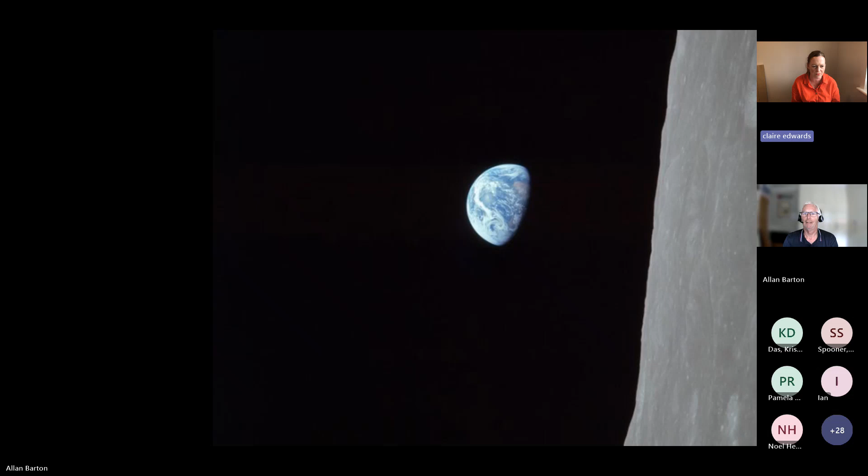So Allan, tell us a bit about the circular economy and help us understand some more. Okay, thank you for that introduction. Well, I'm going to set the scene and explain why do we need a circular economy.

I'll just look back in time. Between those two dates, three major events occurred on our planet. We discovered affordable sources of energy in coal and oil. We had an industrial revolution and our population rocketed, as did our ability to produce technologies, our GDP, the power produced, and our use of the planet's resources.

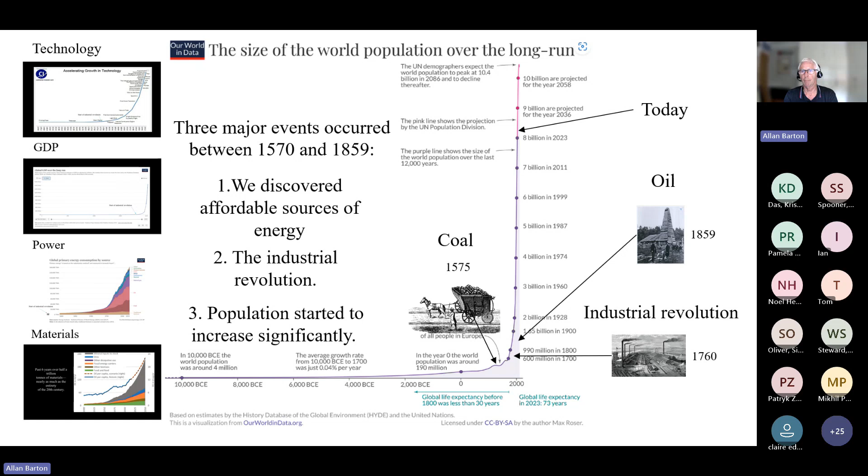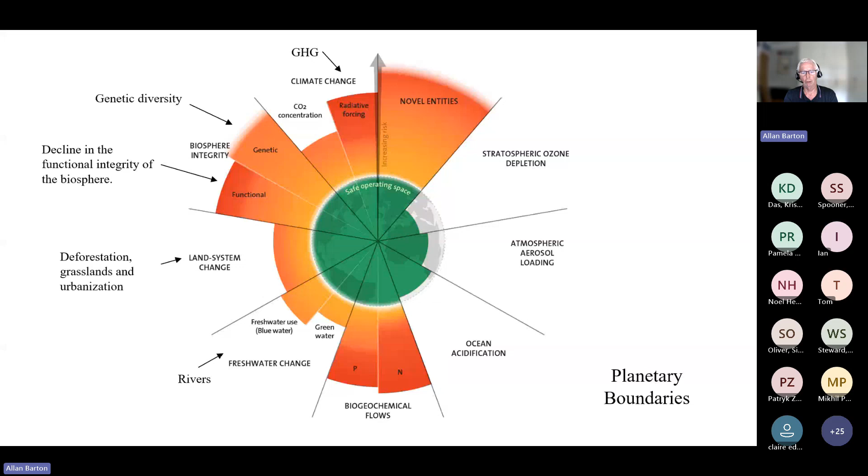And if we look into the future, we're destined to potentially have a population of 10 billion as opposed to 8. And we're already living outside what the planet can sustain, particularly with regard to greenhouse gases, the diversity of our animals, our land use, our water, our use of fertilizers, and our production of toxic materials.

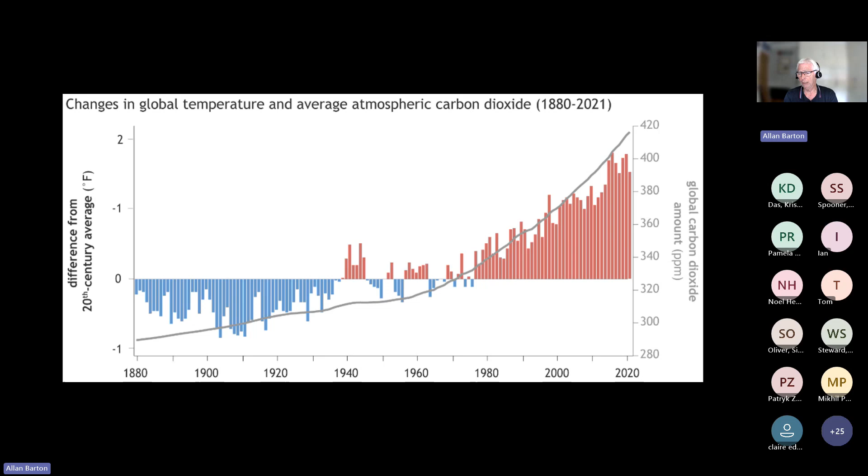And we equally have put more carbon dioxide into the atmosphere, and that's caused our temperature to rise. And now 50% of our planet is put aside for growing food to feed us. And there is a view that we are at the start of the sixth mass extinction event.

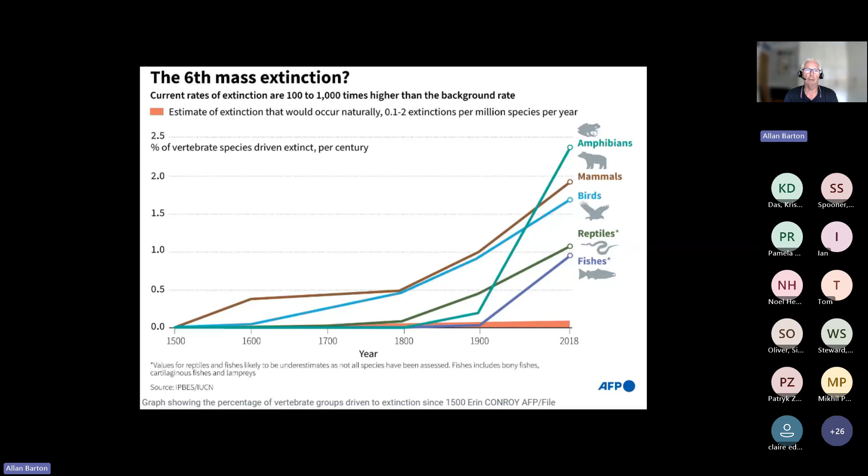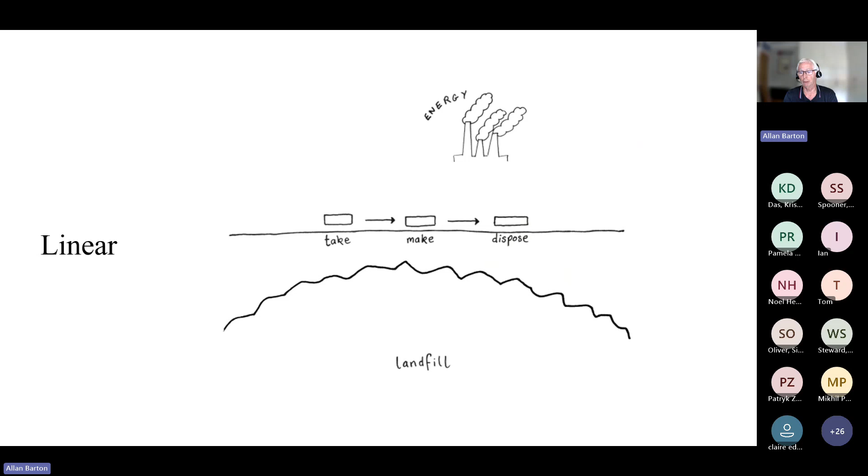And since the Industrial Revolution, we have had a linear economy where we've taken materials, we made them into something, we've used them, and then we've simply thrown them away, either into incineration or into landfill. And we still produced in 2023, 2.1 billion tonnes of municipal waste.

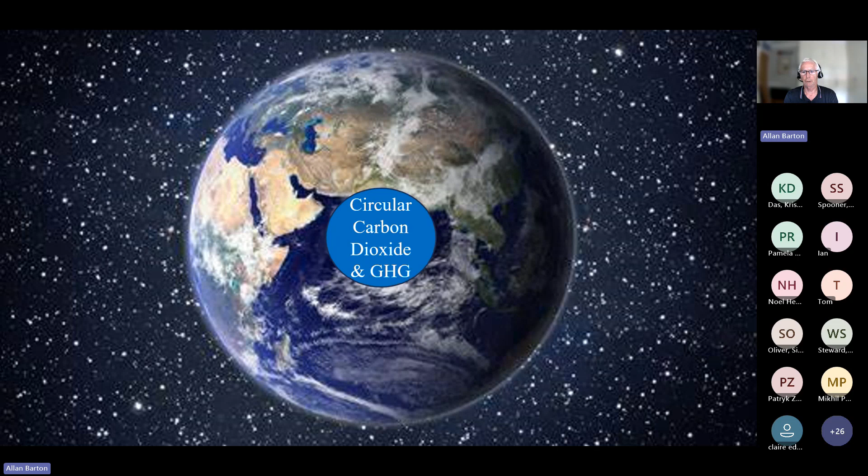So we really must start treasuring our planet. And we must start looking after all of the ecologies that we have. And we need a way of managing our home in a circular way, a circular economy. This is particularly true with regard to carbon dioxide and greenhouse gases, the natural world, material resources, water, atmosphere, and population.

Well, with regard to carbon dioxide and greenhouse gases, we must get our carbon dioxide back in balance again. It was in balance for millions of years, and we've just destroyed that. So we need to deliver on our COP promises. We need to focus on all greenhouse gases and all sectors that make greenhouse gases. We need to develop a joined up plan to achieve it, and we really should try and get back to pre-industrial levels.

As far as the natural world goes, well, we've got to stop its reduction and re-establish it if we can. And we've got to deliver on our COP promises.

As far as the material resources are concerned, we've got to start treasuring our material resources. And we've got to realise the planet's inorganic resources are finite, and they must certainly never be dispersed beyond the reach of future generations. And we should try and reduce consumption and think about the whole system when we design things. And we must try to produce no waste.

Water, well, we've got to start treasuring and managing our water. We need nature-based solutions to help us solve the problems, but we must really stop trying to pollute our water. And globally, we must try and get the global ocean temperature to decrease.

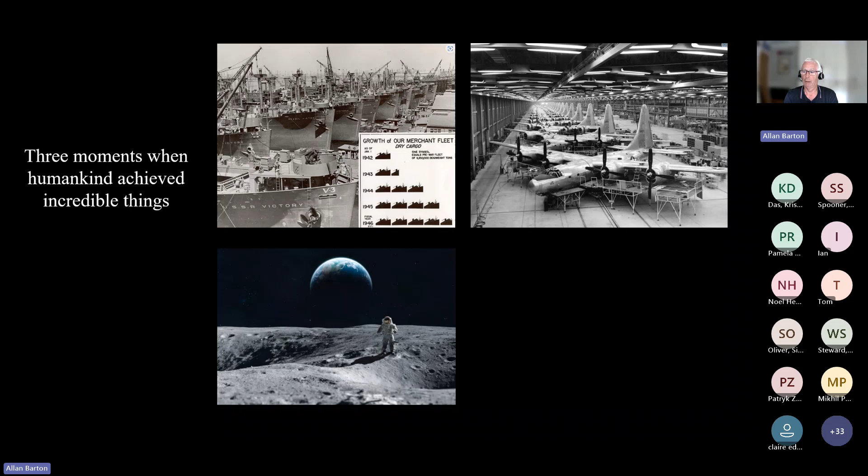Is it inevitable? Is there hope? Well, there were three moments when humankind achieved incredible things. In the Second World War, the United States increased its production of ships and planes fantastically, and we won a war. We did put a man on the moon, and we did generate a vaccine very quickly for a particularly nasty virus. We need the same mindset applied to living in harmony with our planet.

Provided we get on with it, now I believe there is hope. Thank you.

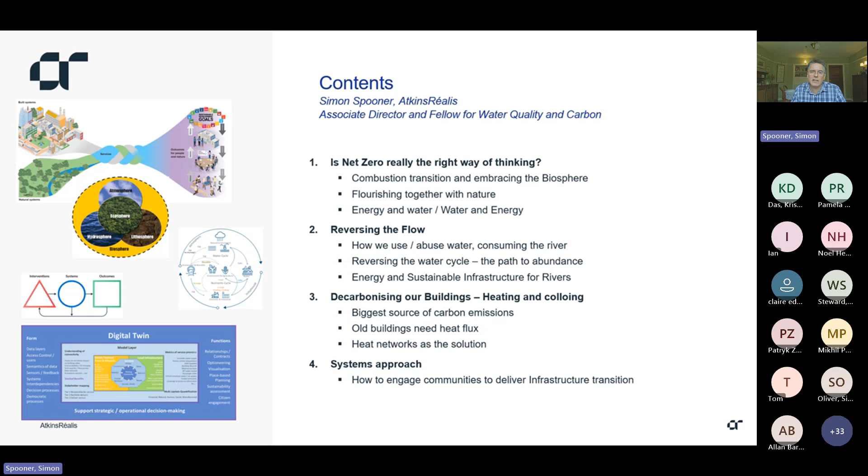But all these different approaches also need to link together. We have to take a systems approach to how we change the different parts of us, how we make interventions and understand how they work, and particularly how we engage individuals and communities in this great process of change and transition.

So I will try and introduce this. Allan introduced it: climate, biodiversity loss, pollution. Yeah, there's a problem. We've got net zero as our goal, which is a well-established target, but it's very hard to follow, to plan for, to know where we are. It kind of starts to slip away when you try and do the carbon accounting. It just all gets away from you.

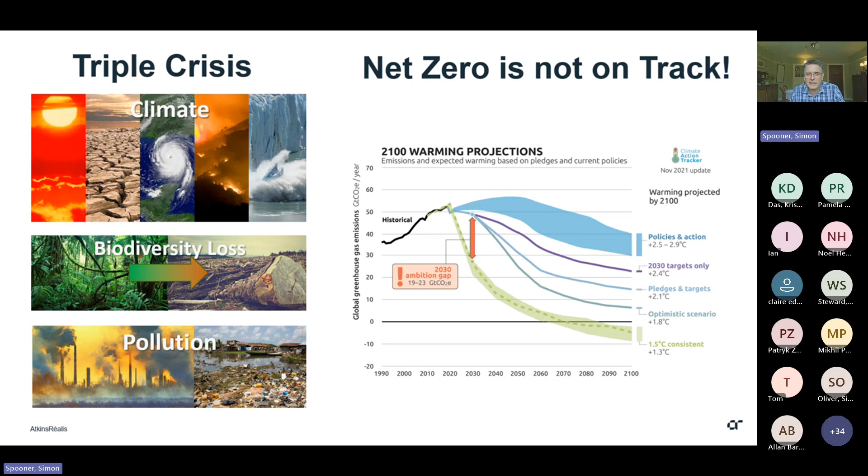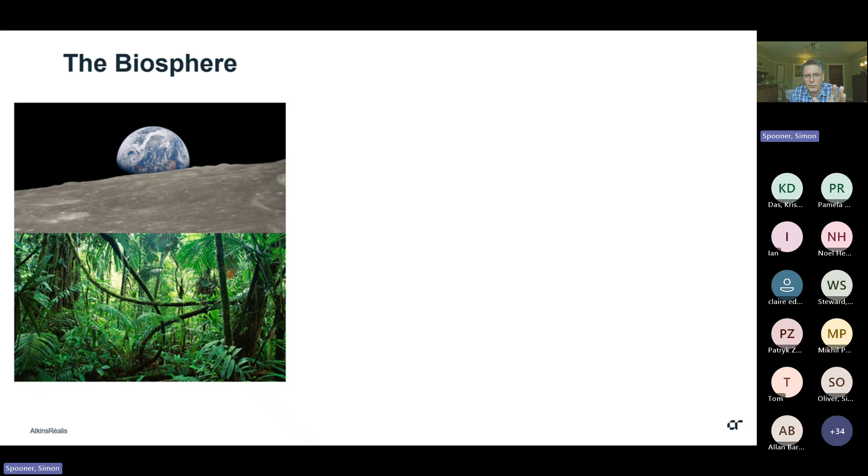So I want to look at it in a slightly different way, in terms of thinking about where we live in the biosphere of our planet, which is the combination of atmosphere, hydrosphere, lithosphere, and ecosphere, the living systems. We're on a living planet. And what has this biosphere ever done for us, as they say?

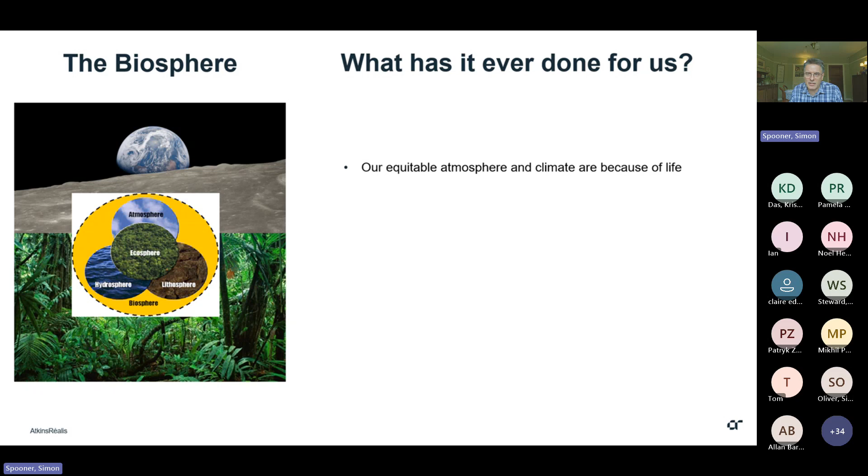Well, basically, our equitable climate and atmosphere are because of life. There aren't other planets like it that we as yet know of, because it all requires life. Living things create a disequilibrium. You get oxygen into the atmosphere, reduced carbon on Earth, and then processes of respiration balancing these gases, balancing a climate, balancing the planet. And that disequilibrium is what powers our life as well, through respiration.

As much as plants photosynthesize to create it, they also use that. And that is also what fire is. Fire is not a natural process that you find anywhere else but planet Earth. The sun is not fire, it's hot plasma. A volcano is not fire, it's just hot stuff. You need life to create that disequilibrium, and the collapse of that is fire.

That's where, as humans, we learnt to use that to clear the land, to take control over nature and shape it to our will. When we enclosed the fire and put it into a combustion engine, that gave us the power to create our industrial society. The combustion engine focuses that disequilibrium on the work we want done.

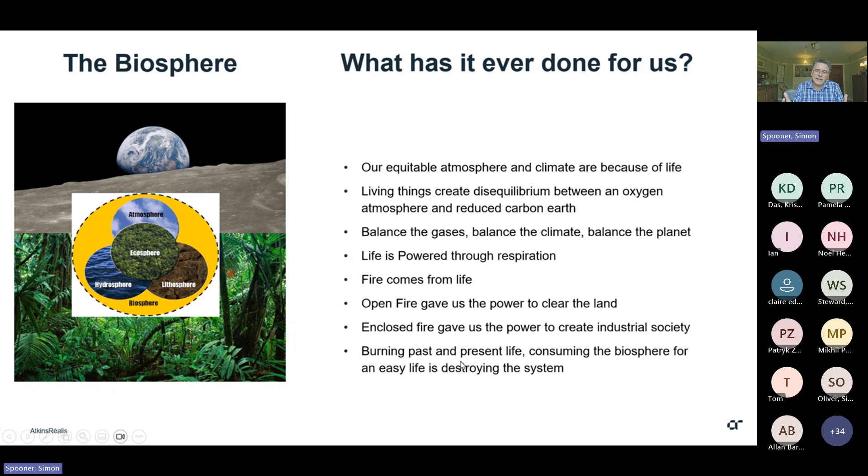And now with fossil fuels, we are burning the past and the present life. Present life - you burn a bit of wood, you're burning present life. Coal, oil, gas - you're consuming what took hundreds of millions of years for the living system to put down. You're releasing all of the balance of atmosphere that represents, and you're consuming life. So we have to move away from that.

So what does that look like? As I said at the beginning, we want to move towards our built environment working in harmony with the natural living things to obtain the services that we need. Every day we need services of warmth, shelter, water, nutrition, security, even beauty. These are things we get from the environment around us.

And Allan was setting out how these can be determined with the sustainable development goals. Those have to be delivered by people and organizations, and ultimately individuals and communities do the work to build it. So this is just looking at how we can move away in our system. And I'll look at some of those elements - the energy system, the water system.

And we need to switch our energy to the circular infrastructure energy, where we're harvesting energy from the environment around us, not consuming from the living process that sustains us. Clearly wind, solar energy - these are very clearly harvesting infrastructure energies, but so are some of the geothermal ones, taking the deep nuclear energy from the planet. And nuclear energy itself is harvesting some of the ancient things left within the planet, and is essentially the infrastructure rather than consuming. The amount consumed is tiny.

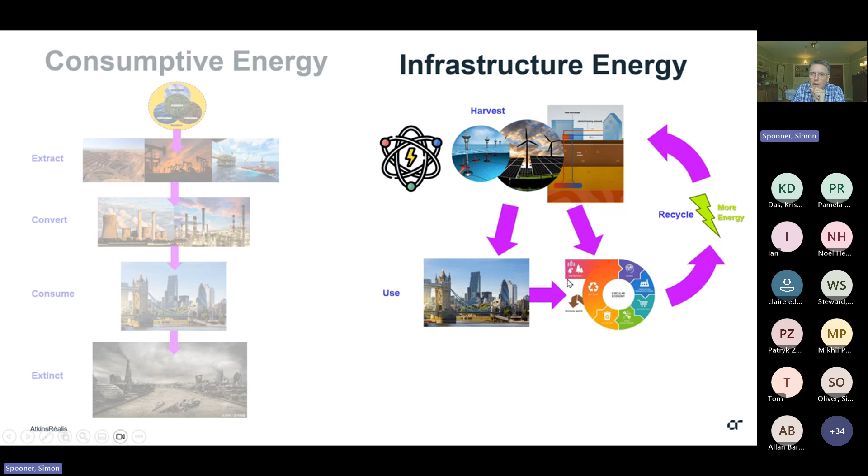So what does this look like, this harvesting of energy? Most of it comes from the sun that is sustaining us.

What we have been doing is going through the middle, consuming the biosphere to get what we want. You might say we need to bypass it, either through renewables or nuclear, so that we get the energy we need to drive our built environment. But we can also embrace the biosphere and work with it, getting what we need from working closely with the living system.

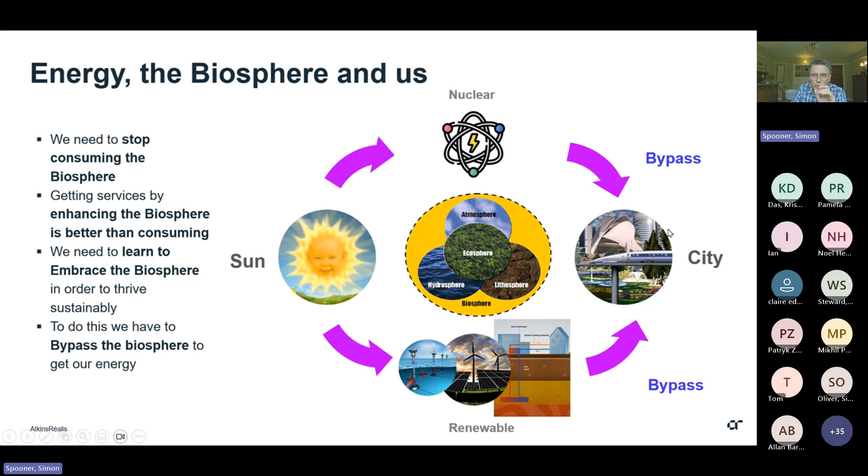When we do that, we also often enhance the biosphere. Farming is basically enhancing the biosphere, creating fields, putting fertilizer on them, ploughing them up and down. We get far more out of it, but at the same time we are destroying and damaging that system, so we have to learn how to work more cooperatively. But the key thing on energy is that we have to move to bypassing that system, to not consuming the biosphere. That's the ultimate test.

I now want to move on to water, because this is what we're trying to look at today, in the context of that energy cycle. So I want to look at a different way. How do we actually have a circular water system? And maybe look at how we've managed our water in the past.

Basically, we take from upstream areas. You make camp as an ancient person by the side of the river, take the water from upstream, and throw your waste as near downstream as you can get away with. As we've urbanized, we reach ever further upstream, up into the hills with our reservoirs, down into the ground to draw from deep aquifers. And we have to send our waste ever further downstream with longer pipes, and now we have sewage works to extend that, pushing it away from us.

We're reaching out in these two directions. At the same time, we clear and plough the land for our agriculture, which destroys and damages the soils, which are by far the biggest reservoir in the UK. It's not a Thirlmere or the Elan reservoirs of Wales I'm showing here, it's the soil underneath every field and every forest and everywhere that we are. And we've reduced the ability of those soils to retain and purify water.

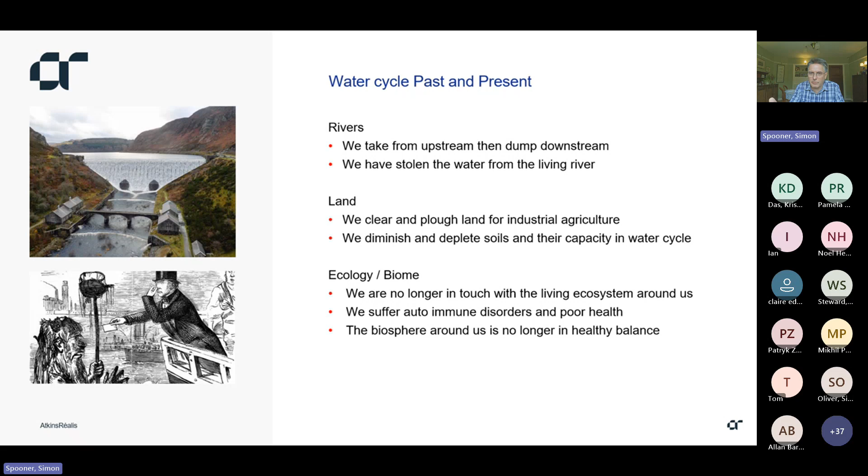We've also, as living creatures, gotten out of touch with that living ecosystem. We are designed to have a biome that works together with the environment around us, not always comfortably. If you are more in touch with the river, you're going to spend quite a bit of time feeling unwell, but ultimately it is what we're designed for. Our separation is also leading to a great many immune disorders and health issues, because we're too separated from that natural world. But we've also perverted that natural world so much that you maybe don't want to be swimming and drinking the water from a river in England. That's really not going to do you any good, because it's not a healthy system that one can engage with.

So how can we change that? How can we move from this current system, driving all the water down and drying out the river, to actually taking the water from the bottom, from before it goes to the sea, treating it highly, supplying it directly back to our cities. Then when we've used it, getting it almost as sterile as we can to go back into the river, so that we're not perverting the biome of the river.

A wastewater treatment works is a wonderful living thing which we've enhanced and powered up. But what comes out at the end of it, it might be chemically quite purified compared to what went in, but it has a totally different biome of viruses and fungi and bacteria that then affect the rivers and change the health of the system. So we need to work out how we can keep that flow going, and allow the life to come into the river. So this is looking through this process.

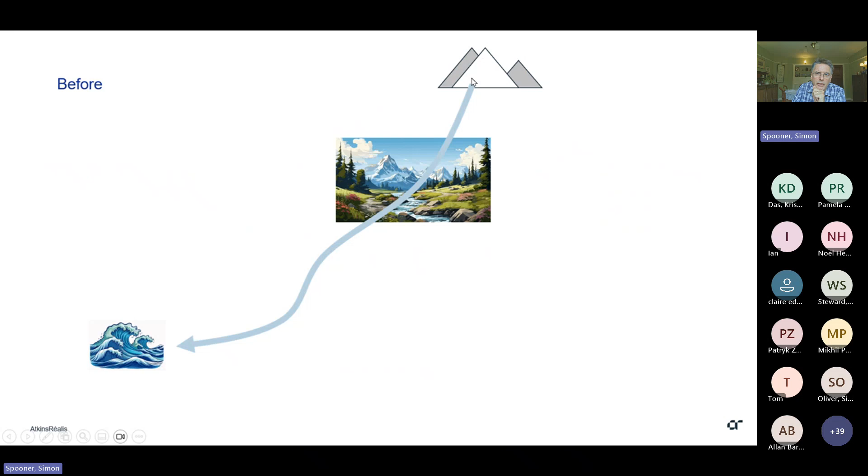Before, from the hills, the water runs down through natural environments. We have put in the farming, we have built the cities, we take the water from up in the hills, we put that into our cities, we put our waste in, and we're also drawing out of the river, depleting the quality of the river up and down, with volumes, depletion and pollution. And as we get further down, it becomes ever more depleted.

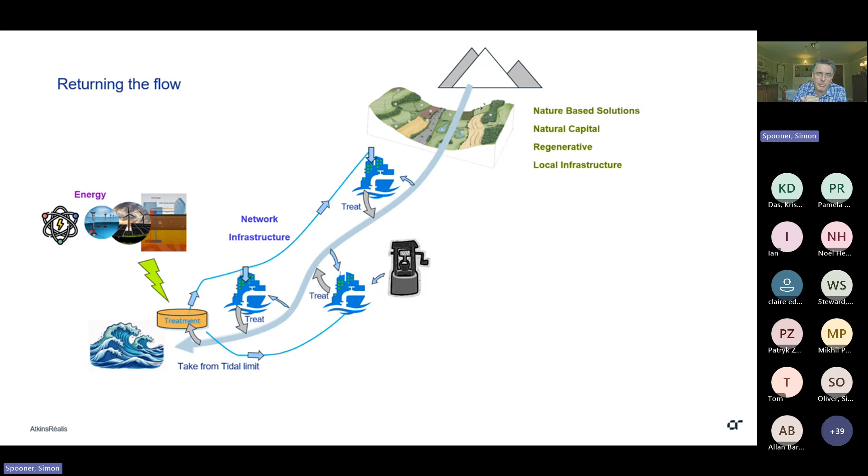But we can do things a different way. It takes more energy, but if we take the water from the bottom of the system, treat it well, and pass it directly upstream to our cities, releasing that back into the river highly treated, it can then keep going down. We can have recirculating water, abundant water supplies, coupled with better soil management and healthier agriculture, and we can have a much more sustainable system.

I always say there's no such thing as a water shortage. There's just a shortage of energy, infrastructure, and organisation.

We can learn to nurture those aquatic systems with us instead of consuming that whole system. This means higher levels of treatment, maybe sterilizing almost at the point of discharge to allow that life to come back. It's going to take a long time to get there. It's not an easy thing to do. But ultimately, this is a route to sustainable water, but it does need abundant, sustainable energy as well.

This is circular economy. All circular economy is energy intensive because you're going against entropy, you're going against the system, you're having to reorder things. And so that needs more and more energy, which is going to have to compete with the other great needs of hydrogen and other circular economy aspects, which all need more energy.

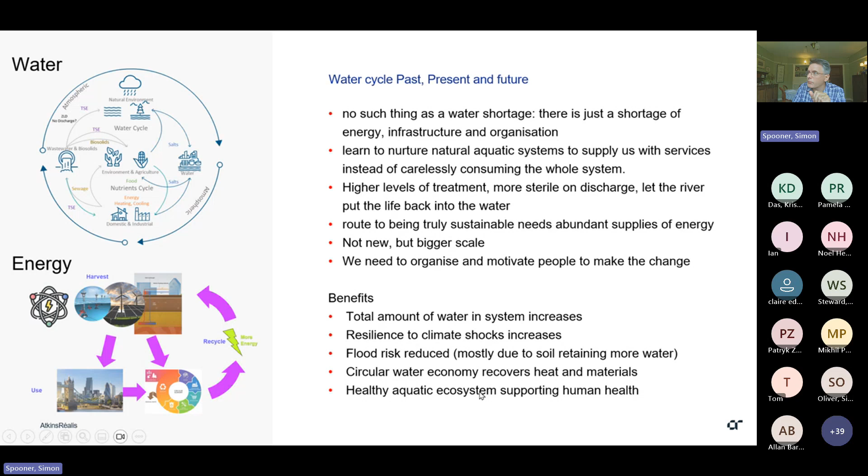So this is not a quick fix, but ultimately we can have greater abundance of water, a system with healthier soils and recirculation, which would be far more resilient to climate, reduce flood risk because of the soil retaining more water, and we'd also be recovering the heat and materials from that water system and having a more healthy system.

I'll give some examples of how this has progressed or is coming into being around the world. First, I'll look at Singapore. There, 40% of the water supply is now actually recycled wastewater - not direct into the pump into the system, but they take the wastewater, treat it to a very high degree, and then put it back into the reservoir. At the top, it runs down the river. They take that out, treat it again, and so more and more of that goes around.

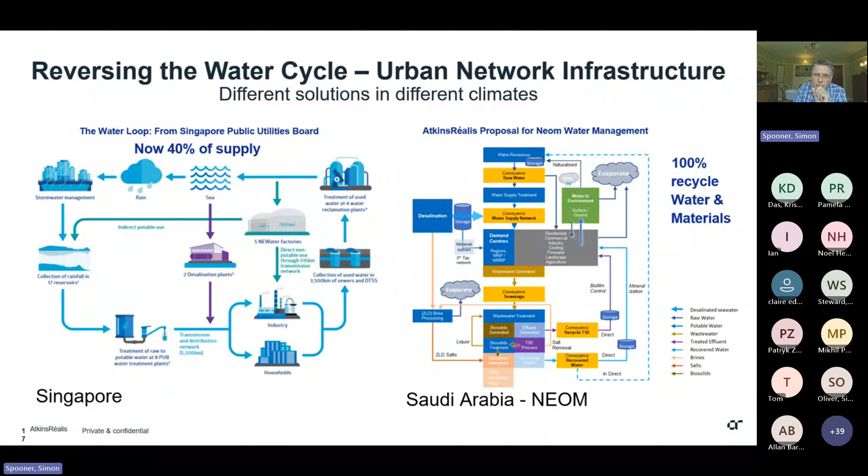In more extreme desert environments, such as Saudi Arabia, we're building this NEOM and the Line - ideas for sustainable cities in what is pretty much like the surface of Mars there. There you're aiming for a 100% closed water cycle, where you're recovering all of the materials and minerals from that water cycle using a lot of solar energy, but you still need to have some natural systems in there. You've got to include some lakes and some living elements to it, not just chemical works.

Back closer to home, if we look at East Anglia and the plans now for lowland reservoirs, the Fenland Reservoir, which is coming down close to where the rivers become tidal, to be taking that water out, supplying Cambridge and further upstream, and reducing the load on the chalk aquifers and the chalk streams to try and improve and increase the abundance.

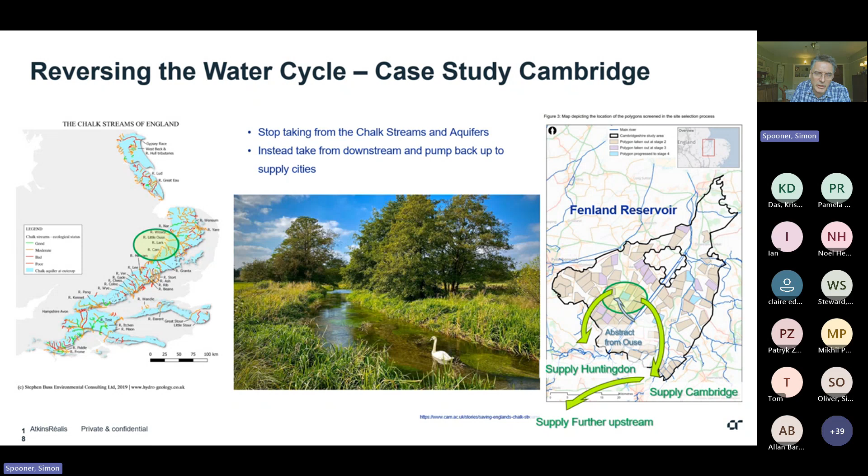This is now getting coupled with plans for greater levels of desalination as well. Desalination is kind of the extreme end member in this. There's an infinite supply of water in the ocean, but you need a lot of energy and a lot of infrastructure. So it's not the easiest thing to take forward.

I then want to touch on decarbonising the built environment. Some 30 to 40% of our carbon emissions, depending on how you count, are from buildings, mostly in the UK from heating them. In other parts of the world, it'll come from cooling. The heating is quite difficult to decarbonise because fossil fuels are really convenient for heating buildings.

And also our buildings have been built - most of our existing buildings, all those Victorian houses with fireplaces, they're supposed to have a strong heat flux through them. The fires, your heating system, it's not just there to keep you warm, it also preserves the building. And if you just wrap everything in insulation and reduce the ventilation, you have big structural problems. So how do you supply that heat flux and enough energy without having to knock a building down and start again? How do you supply that energy?

Because for a new building, it's quite easy. You can keep it all insulated, slap a couple of heat pumps on it, and you're away. But for older buildings, and that's most of it, you need to get that heat flux in. And heat networks, moving heat around through water systems, are the way that one can do that. You can harvest solar thermal energy, which is incredibly simple - you just need a black pipe, basically.

Send the warm water down into the ground, to deep ground, store it in the summer, extract it with heat pumps in the winter. This is very different from district heating.

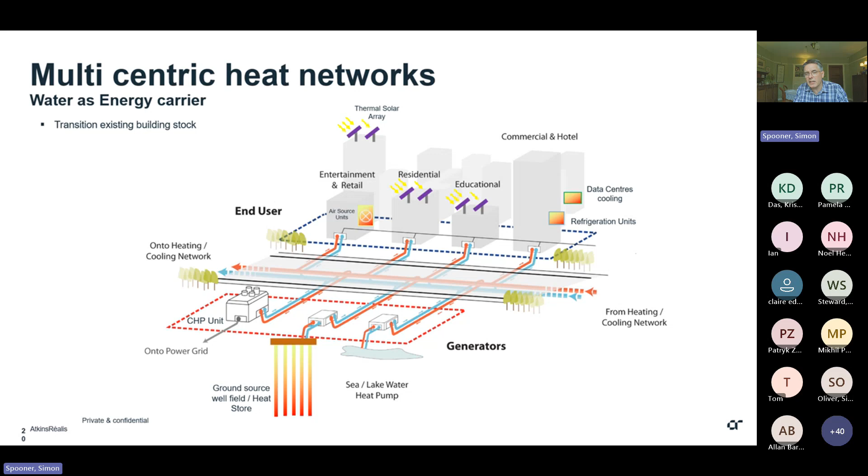It's not very good. So district heating doesn't get you away from burning stuff. But a heat network with heat pumps can use basically lukewarm water at ambient temperatures, quite a lot of it, to move the heat around that you need. And this can become a new...

Utility. And the great thing with heat networks is they don't have to be very big. It's not like you've got to create a national grid. You can do it street by street, area by area. You can cross-link them. You can have different ownership models.

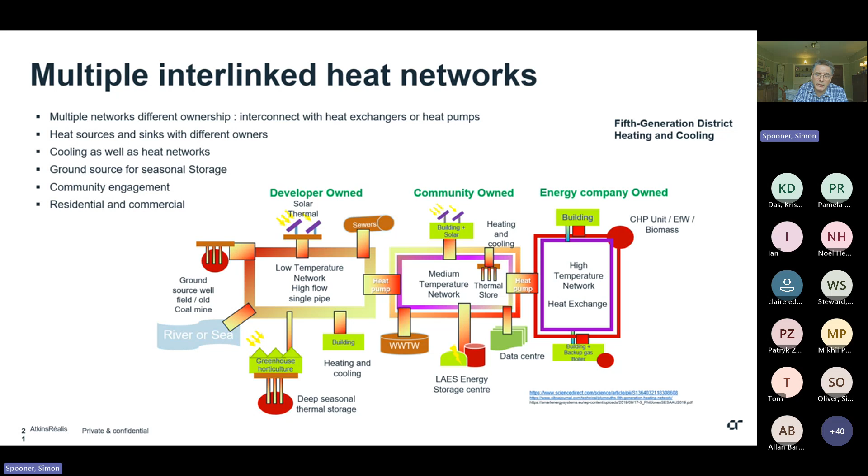Some could be privately owned or developer owned. You could have community, town ones, council owned, or just parish organisations, residents associations, or you could have big energy companies entering into this. So there's a lot of different ways you can combine all sorts of different sources of heat. You can combine that with cooling systems, which is going to become much more of a thing, and store that summer heat in the ground for the winter. So there's a huge change which we need to make in our system.

And then the final thing, and I'm not going to have time to go into this in great detail, but all of these elements - that building heating system, the recirculating of all of the water around the system, around the rivers, the interaction with our agriculture and soils and flood risks - we've got systems with multiple components which are complicated, and we need to be able to understand how that interacts.

And we need to take this systems framework approach. We need to understand what our system is, what is the outcome we're trying to provide. And I set that outcome earlier with this sort of flourishing with nature, so enabling people and nature to flourish together for generations. That's our defined goal.

And so what interventions do we need to take? What are the steps to get us there? How can we work our way towards that goal? And this is where I'm a consultant, so this is where we get into doing modeling and metrics and digital twins and all the clever stuff that we like to do as consultants and engineers and scientists.

And I think there is very much a way forward on that. And it's about transforming our infrastructure, incorporating natural systems into it. And it could be looked at as two sort of groups of infrastructure.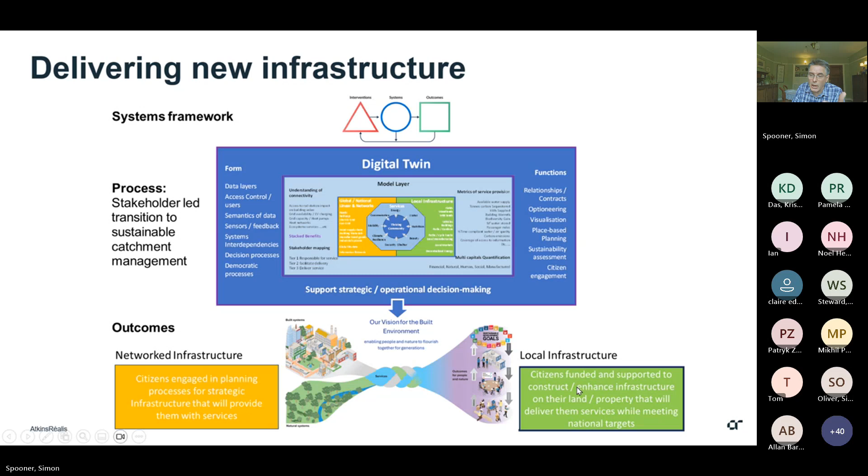So running to time, I'll just summarize what I've been saying, which I hope made some sense, but I realize it could be a bit confusing.

So basically, we're part of a living biosphere. That's what sustains us, and what powers us. It powers our bodies, and it powers our industrial society. We've got to work out how we stop consuming it, how to work as part of it, or where we're not working as part of it in a way where we're bypassing it. We're getting our energy and we're not messing with the living system.

From a water perspective, we've stolen the flow of water from our rivers over the generations, and we need to learn how to put that back. With energy, infrastructure, organisation, we can put that flow and life back into the rivers, and they will return that with abundance for us. Water and energy, very closely linked in this. It's all part of that circular economy.

You're trying to drive things in the opposite direction. That takes energy, effort and organisation.

The biggest move we have yet to make in decarbonisation and moving towards net zero is the heating and cooling of our buildings. And we need to get the water systems as part of that.

Most of all, we need to engage people in that process of transformation, so that they feel part of those large-scale network things - your big rail project, your water transfer, or new road scheme. But also they need to be fully supported, funded and motivated to do their own local infrastructure and make the little changes that plug into those bigger schemes.

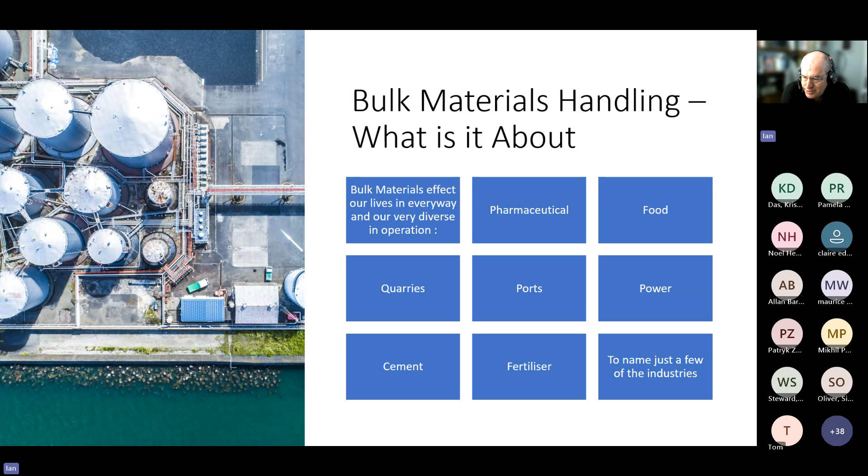So in my day job, we tend to be more involved in the large bulk industries that are seen to be the large polluting industries. So I'm going to talk primarily today about some of those.

So what are we doing to move towards a circular economy? The short answer is not as much as we should be. What is being done is being driven through necessity, legislation, CO2 credits, the drive to be more efficient, but it's all being pushed rather than being embraced.

Lack of availability of raw materials - Simon's touched on this. A lot of the materials used in bulk are quarried or mined. These are not infinite. We might think they are, but eventually they're going to run out. We have to treasure them and find other ways of using them.

And political pressure - it's politically seen to be good, to be treasuring our resources and the environment. So some companies are paying lip service to this, but not really taking it seriously. So the bulk industry's got a lot to learn - we are trailing behind many of the others.

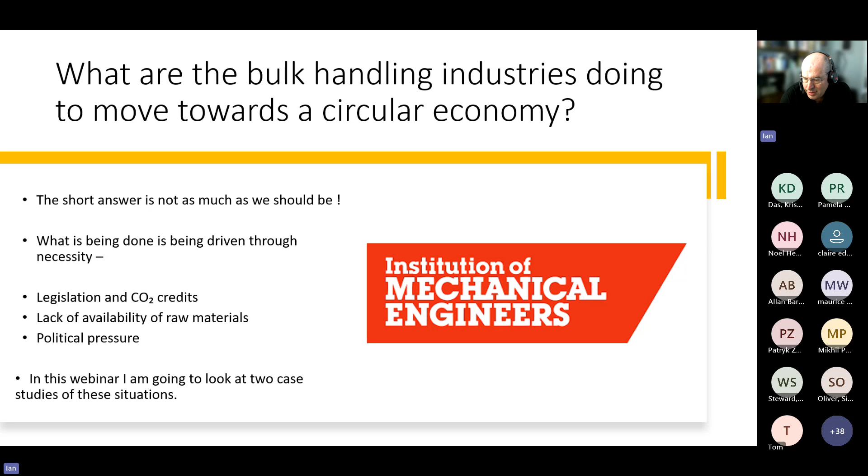So I'm going to look at two case studies here. I'm going to start with one on the cement industry. Now, cement's a major construction material. It's used worldwide, and it is probably one of the most used materials on the planet.

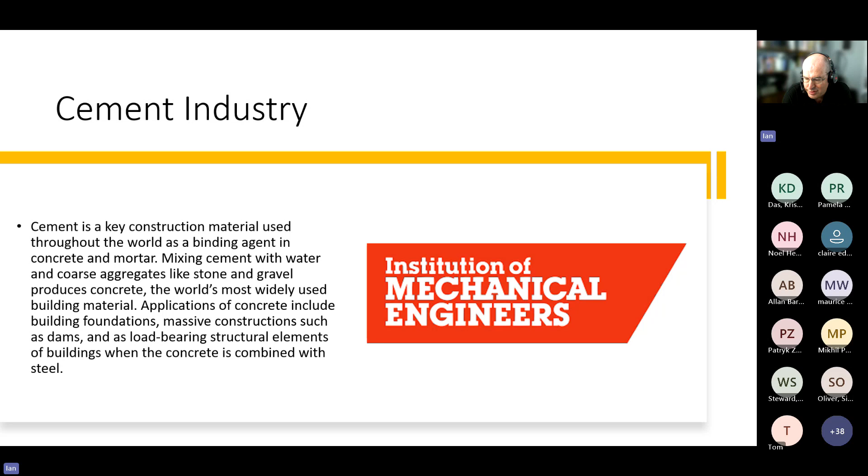If you look at the cement industry, in 2023 we emitted 2.4 billion tonnes of CO2, which was 6% of the total emissions. If it was a country, it would be the fourth largest greenhouse gas producer. So what is the cement industry doing?

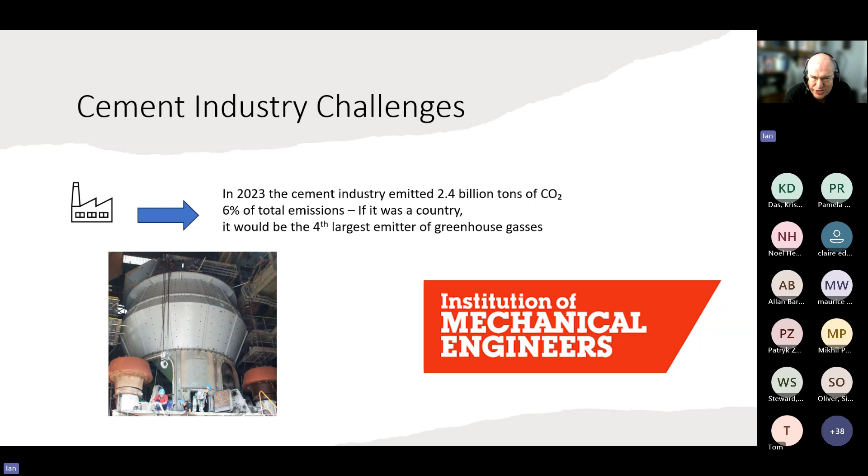They're looking at many things, but there in the picture is a vertical mill. They've looked to move more towards efficient milling because it's a large power user. The old ball mills have become less of a feature, and you'll see more vertical mills, more efficient classifiers, and the drive to get their kilowatt per tonne down. But that's just a small part of it - that's not the real core of it.

So one of the things that's happening - people are embracing this new 7979 spec from British Standards, where they can add calcium carbonates or other pozzolans. With the calcium carbonate, you can go up to 20%, so that reduces your CO2 by 20% on your product.

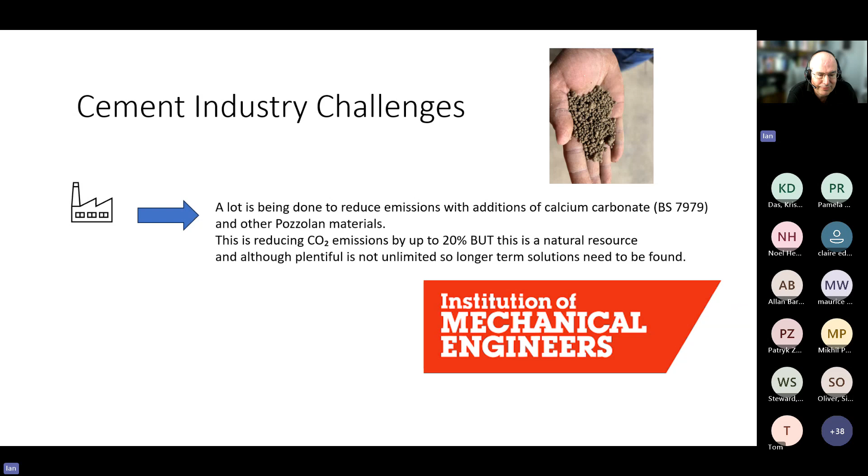But calcium carbonate, limestone - it's a natural resource. We say it's plentiful, but it's not going to last forever. So we have to find other ways - we can't keep using new raw ingredients. So one of the other things being investigated, and there's a lot of research being done on, is to reuse cement. So how do you do that?

One of the ways is to pulverize the old cement down to a fine powder, add some moisture and heat, and typically direct the kiln exhaust back through there. That will help to absorb the CO2, reduce greenhouse gases, and reactivate the cement. But there are limitations: you can't use it for high structural strength, and there's only so many times you can reactivate it. Further research is needed, but it's not being looked at enough. The drive is more to add pozzolans and reduce outputs.

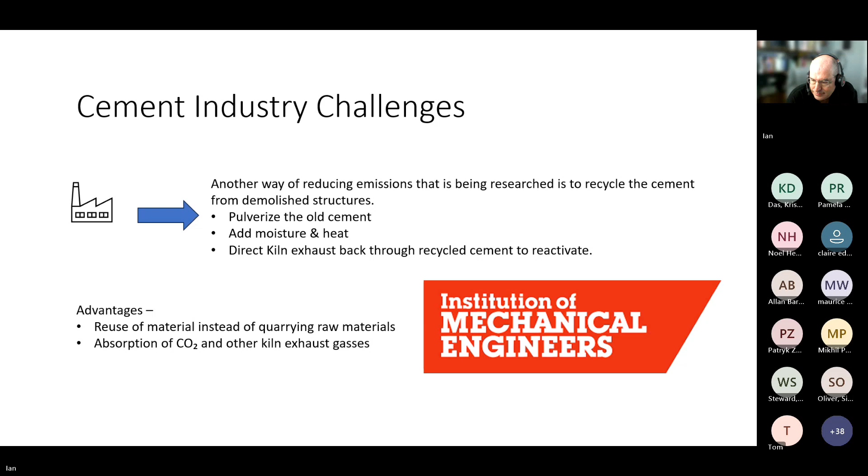The other one I'm going to look at is the fertilizer industry. It's another large user of raw materials and also a large polluter, so the environmental impact is huge—organic, industrial, domestic waste streams, dust and odour, energy, air emissions, packaging waste, and leaching in the soil. Leaching in the soil has been a big point of discussion in recent years with algae blooms in the rivers, which links into Simon's water talk earlier.

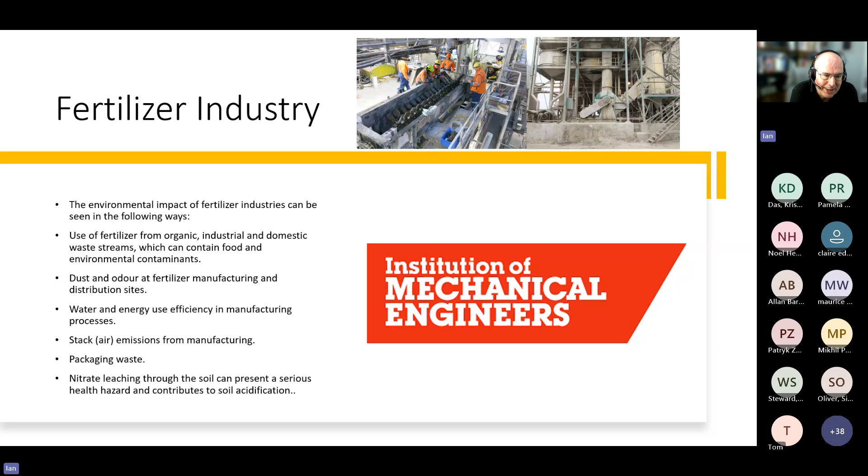Part of the fertilizer industry's target is to reduce the amount of fertilizer being put on the land, and a lot of the major players now are offering surveys and support to farmers in reducing their fertilizer coverage. But that's not all of it.

Phosphorus, the P in fertilizer, is one of the main components used worldwide. It's typically sourced from apatite rock, which is widely available at the moment, but high quality sources are getting less. You used to be able to get it at 36% P2O5; now you're seeing 25% rocks as being good. You're also seeing the use of igneous rocks, which are harder to grind, so you use more power and more energy. And you're also seeing heavy metals in these rocks now, which is not good for the plants or the ecosystems, and washes into rivers adding more issues for the water.

So what's being done? There's quite a bit of work on reclamation of phosphorus from human sewage, animal bones, and other carcasses. One client of mine in Europe is now producing a totally renewable phosphorus fertilizer, taken totally from bones and human sewage. The most popular way is to precipitate the calcium phosphate out of the sewage and strengthen it to increase the content, because typically sewage ash is 9 to 11% P, and we're looking for 12 to 16% P in a finished product as an ideal. So that's one solution, particularly for phosphorus.

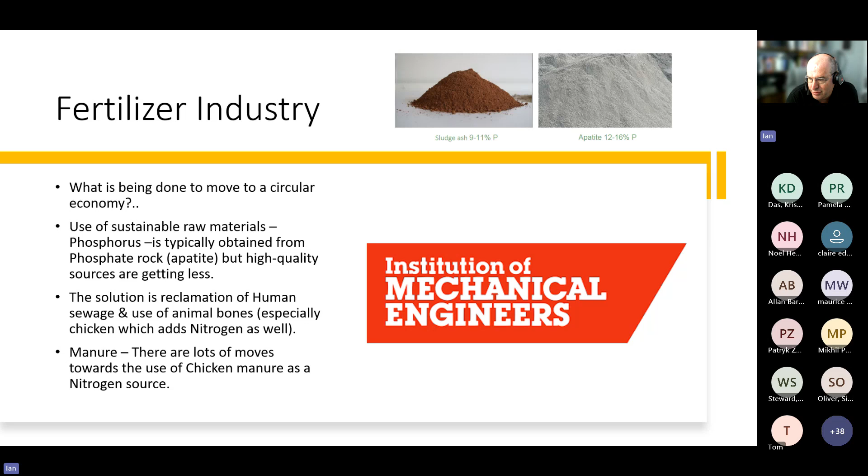Stack emission tests are done infrequently in many places, which means the site does not look after it properly—it's a cost, so they want to do it but don't want the expense. The other thing is, when you've got stacks on fertilizer plants and scrubbers, you end up with waste. That waste has typically been dumped into lagoons to evaporate, and the waste solids disposed of in various manners. So it's all adding to what we're leaving behind on the planet.

But what is starting to happen is there is a drive now to try and make a viable product from the waste streams that can be reused either into the main product or in an alternative way. So there is hope, but it's not moving as quickly as it should. Emissions and waste streams are something that is low on the investment list quite often.

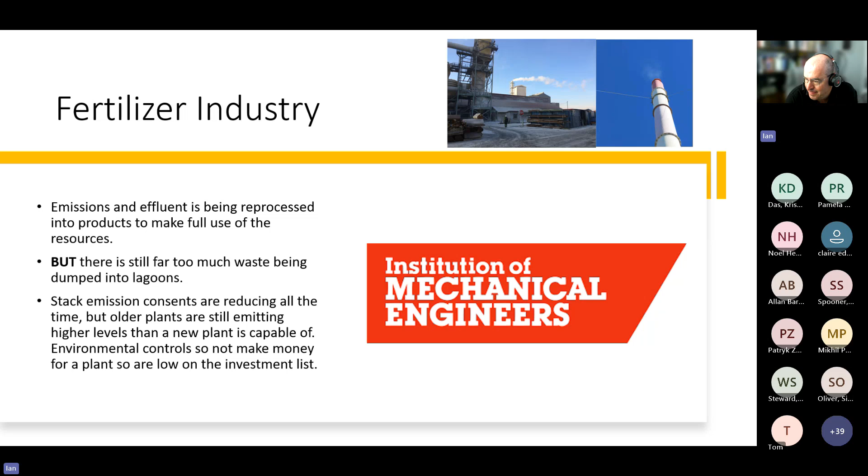As a wider overview, bulk materials industries are big users - quarries, fertilizer, cement. We're high power users, and because of that, we're high emitters of greenhouse gases. There is a drive to reduce it with high efficiency motors and more efficient ways of processing things, but it's being driven more by cost than a desire to support the planet.

We have a poor public image, which we're doing nothing to help, really. We're seen as a dirty industry. People say cement, they say fertilizer, and they see a dirty, polluting industry. What companies are doing is moving production away from developed Western countries to developing countries and hiding behind that, which isn't the answer. I know many major names who are just producing in low-cost developing countries so they can hide behind the pollution and emission situation.

And that links into the emissions. Dust emissions are the biggest problem with bulk materials - it's not being handled properly. You go to most quarries or bulk material handling ports, and you will see dust. It's not being handled in the best way, and that is all going into the atmosphere. It's wasted product, and it's also getting into water courses and other places it's not wanted.

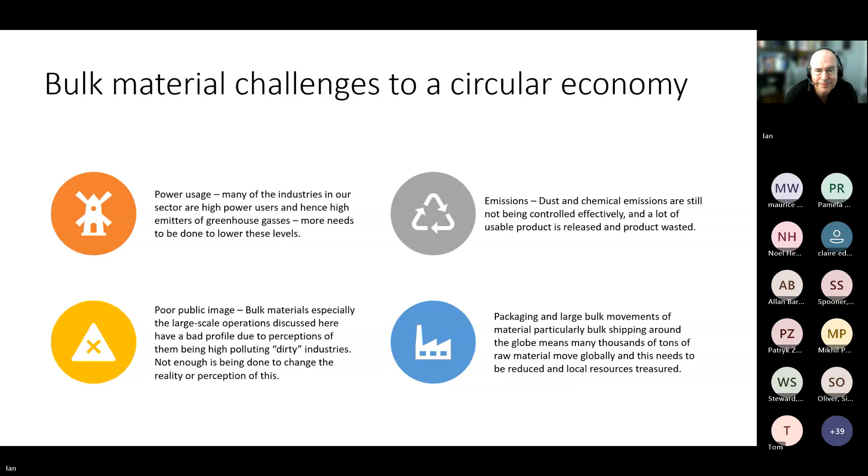And on that note, I'm finished a little bit early, but I'm going to hand back to Claire with questions.